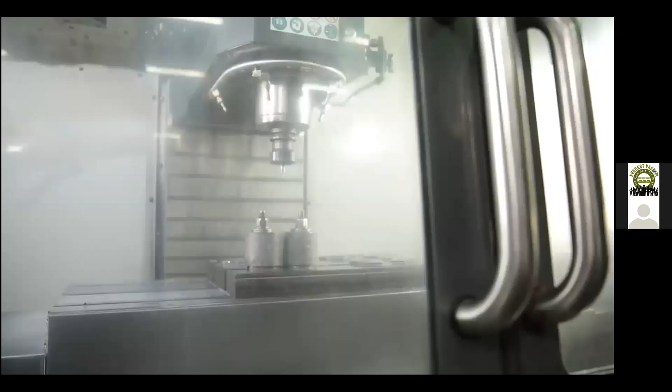In 1998, Everest Blowers Group went on to get its first ISO certification and also crossed international borders by exporting the products overseas. Over the years, Everest Blowers Group has made sure that it has abided by all industry norms through various certifications. The Everest Blowers Group has been associated with many different industrial giants from different verticals, bagging prestigious orders from them. An innovative thinking and approach has made the company excel in many first-time achievements.

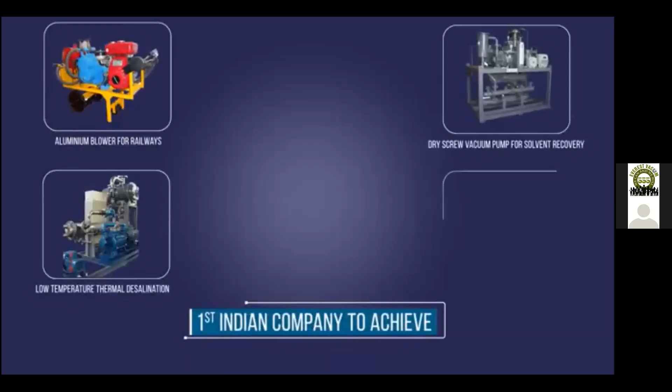Everest installed their first CNC machine in mid-2000s and since then has increased number of equipments to cater to the growing demand of the market.

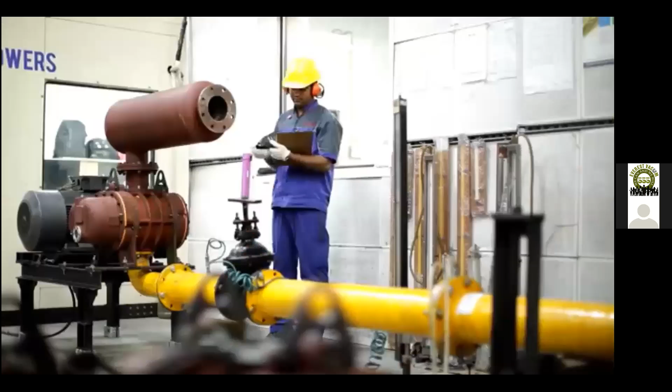Everest started manufacturing their range of tri-lobe blowers as a more efficient alternative for reduction in noise and vibrations. The group has received accolades and admirations in the recent years, touching the sky.

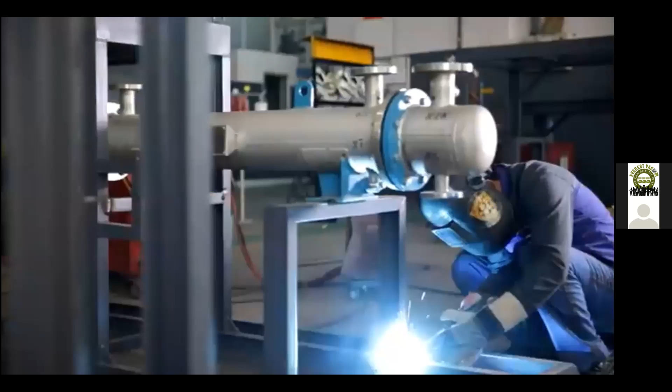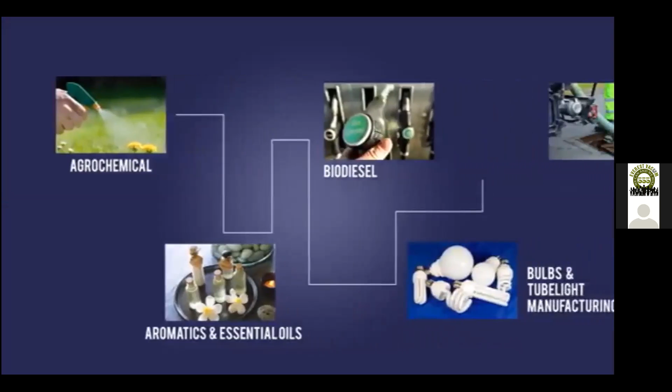The vacuum systems facility also started a dedicated unit to cater to the needs of complete skid-mounted systems requirements of our customers. The vacuum division is currently manufacturing around 350 to 400 complete skid-mounted vacuum systems annually, with a very wide industrial base spread across various applications.

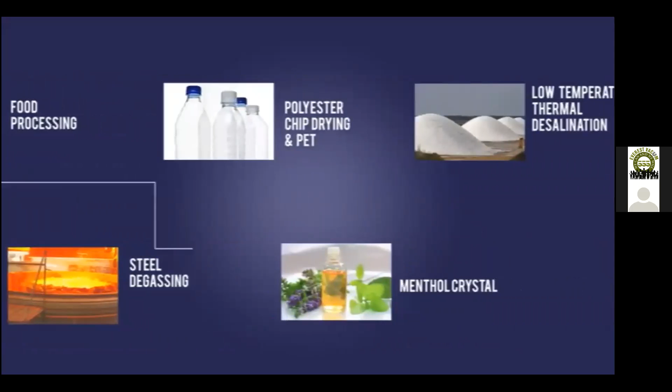The Everest Blowers Group is proud of its journey in scaling new heights and is in the pursuit of excellence. We are following latest industrial practices of Kaizen, 5S, and other lean manufacturing techniques.

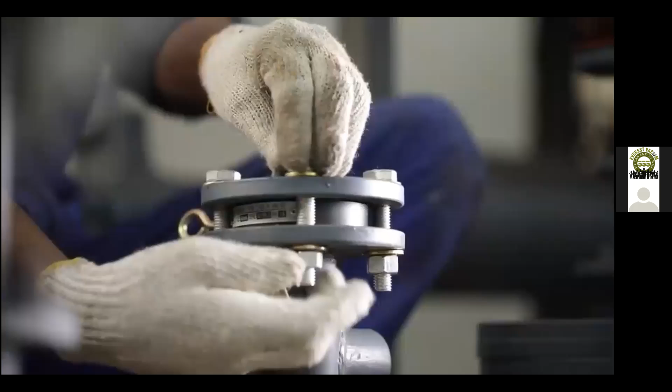To always remain connected with our stakeholders, we are available on all the leading digital platforms and have an online complaint portal, technical manuals, and a vacuum calculator.

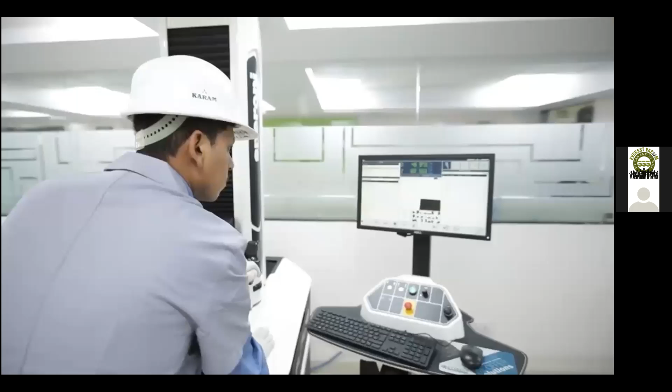It's been a little over 8 years since I've joined our family business, and we've experienced good growth with some diversification. I really enjoy what I do, as every day is a new learning of something interesting helping us serve our customers better. So at Everest, we believe in very strong fundamentals of quality and innovation.

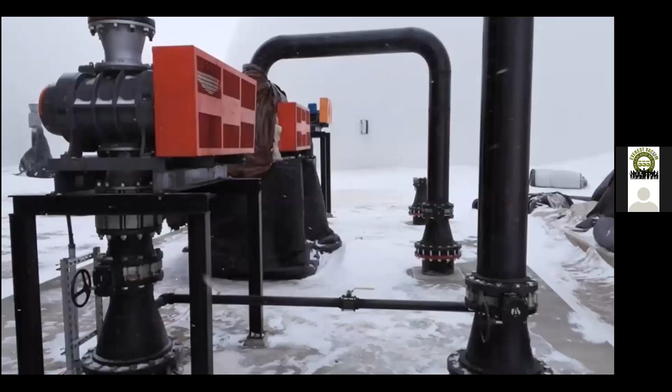We are the first and only company in India to have manufactured dry screw vacuum pumps, mechanical vapor recompressors, amongst many other products. With presence in the Indian market for over 3 decades and more than 150,000 equipments successfully installed, running in 38 countries worldwide, we are a trusted brand.

Our vision is to further build and sustain a positive relationship with our customers, to have an innovative and motivated work environment, and to ensure a bright future for all our stakeholders. The Everest Blowers Group, standing tall like Mount Everest, reaching for the sky, now and forever.

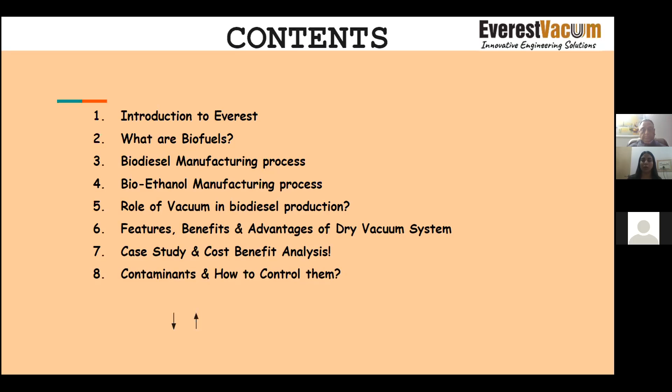All of this information we will explain you with one of our case studies and the cost benefit analysis. Then we will explain you about the contaminations and how we can control it. Then we will move forward. We will explain you about the rule of 2030 as we explained you in our previous webinar also.

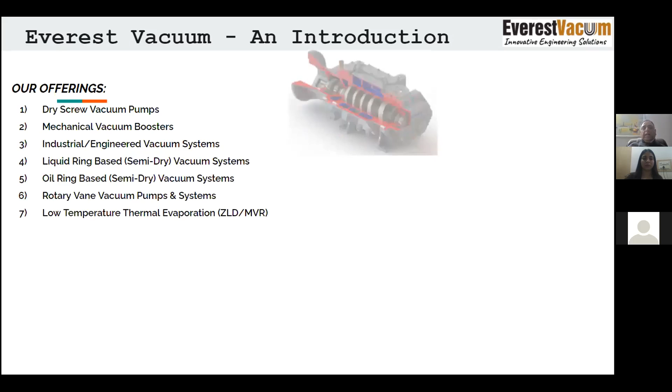introduce to you. We offer dry screw vacuum pumps, mechanical vacuum boosters, industrial engineered vacuum systems, liquid ring based which are also called semi-dry vacuum systems, oil ring based similarly called semi-dry vacuum systems, rotary vane vacuum pumps and systems, and zero liquid discharge low temperature thermal evaporation. These are some of the pictures of the products that we manufacture, as well as the complete solutions that we provide to our customers.

What's our promise? Our promise is clean, reliable, and sustainable vacuum, improved product yield, deeper and consistent vacuum, cost and space saving by right sizing, resulting in reduced operational cost.

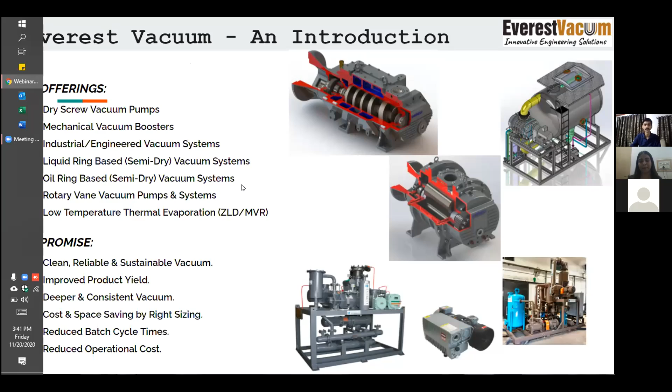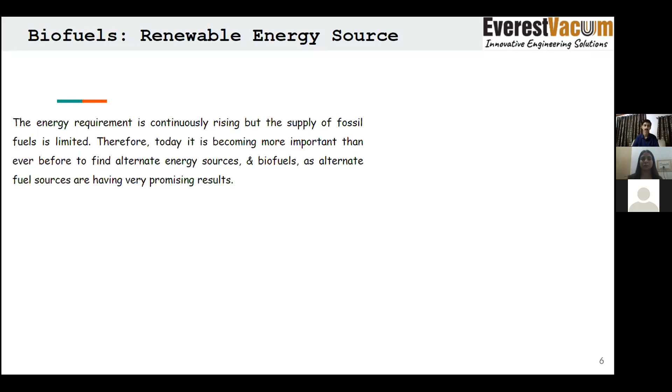Thank you, Chetna, and good afternoon to everyone. So what are biofuels? Biofuels are any fuels which are derived from natural sources, or biomass, and these are renewable sources of energy. Why do we say renewable sources of energy? Because these can replenish themselves over the course of time. And why do we need to talk about biofuels? As we know, the energy requirements are continuously rising, but the supply of conventional fossil fuels is limited. Therefore, we need to look after some alternative sources, and biofuels as alternative fuel sources are giving us very promising results.

Biofuels are well-engineered fuels, which are also gaining popularity due to the rising cost of fossil fuels. The most common biofuels are bioethanol and biodiesel. While biodiesel is manufactured by transesterification, bioethanol is manufactured by fermentation.

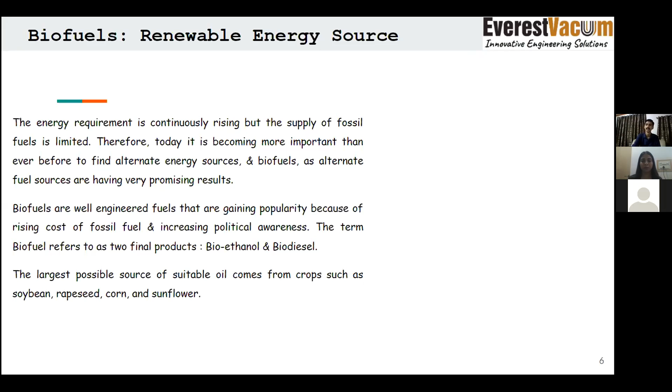The suitable feedstock which we can use to manufacture biofuels can be classified into 4 generations. In first generation, we have the food biomass, such as starch and sugar-rich crops. Second generation comprises non-edible feedstock, which is generally agriculture and forestry waste. The third generation is the integration of marine algae, whereas the fourth generation are genetically engineered crops.

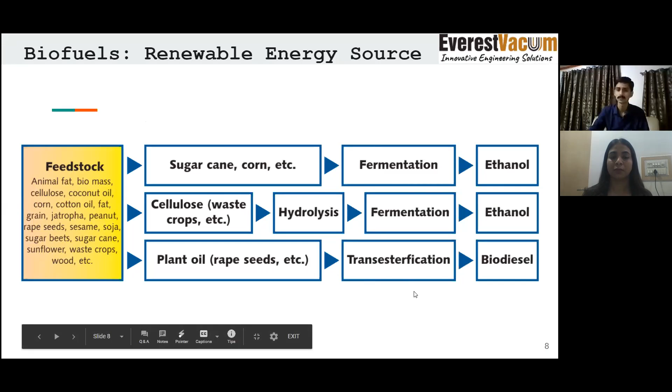As we can see, the feedstock, which may be animal fat, biomass, or any other oil or crop, can be processed either via fermentation or transesterification to give us ethanol and biodiesel. Let's start with biodiesel production. Biodiesel is produced by the process of transesterification.

As we can see from the reaction here, 3 moles of alcohol react with 1 mole of oil in the presence of a catalyst to give us biodiesel and glycerol as the end products. The catalyst has to be a strong acid or a strong base. Generally in the industry, sodium methanolate is used as the catalyst. Here is a picture of raw biodiesel and glycerine, which is obtained by this transesterification reaction.

This is obtained through this separator. Once we have separated the biodiesel and glycerine, this is how the biodiesel is looking after the washing process, and this is the pure palm biodiesel oil. This glycerol, when purified and cleaned, can be used in the food, oleochemical, and cosmetic industry.

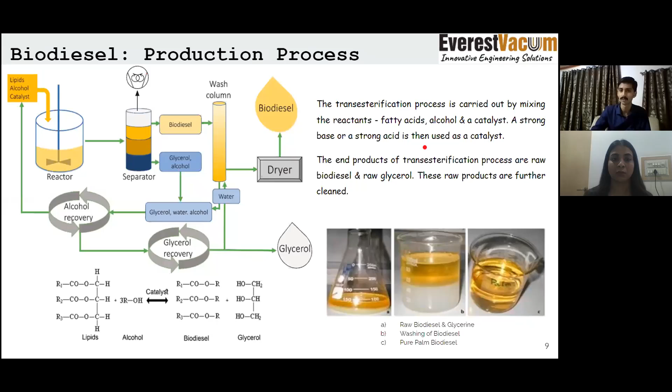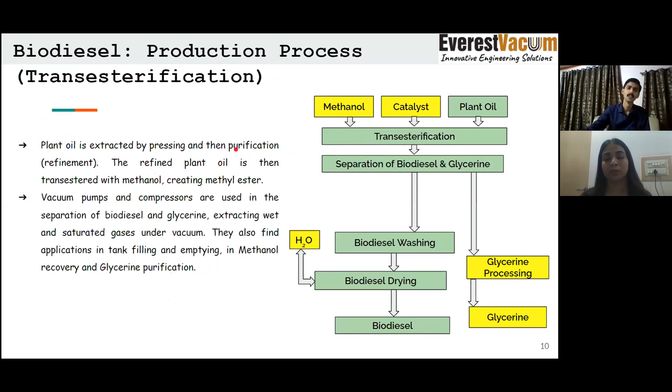Here we are depicting that the vacuum systems are connected to the separator where we need to separate biodiesel and glycerol. In this process of transesterification, for any plant oil, methanol is the most commonly used alcohol in the industry. Since we are transestering methanol with the oil, the product we receive is methyl ester. Vacuum pumps and compressors are used in the separation of biodiesel and glycerine at this stage, and extracting wet and saturated gases during this stage, in methanol recovery, glycerin purification, and many other applications.

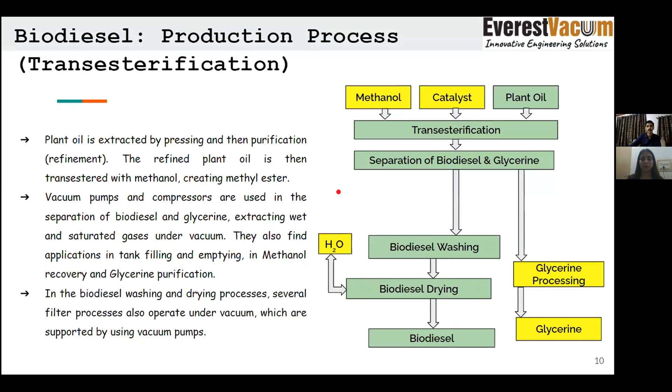If we take a typical example, we have 1000 kg of oil, which is put into reaction with methanol and sodium methanolate. What we receive out of the reaction is 1000 kg of fatty acid methyl ester, some glycerine, and free fatty acids with roughly 1 to 2% of moisture content. This is generally a batch operation where the temperature ranges from 70 degrees to 250 degrees, and the working vacuum is in the range of 100 torr to 0.5 torr.

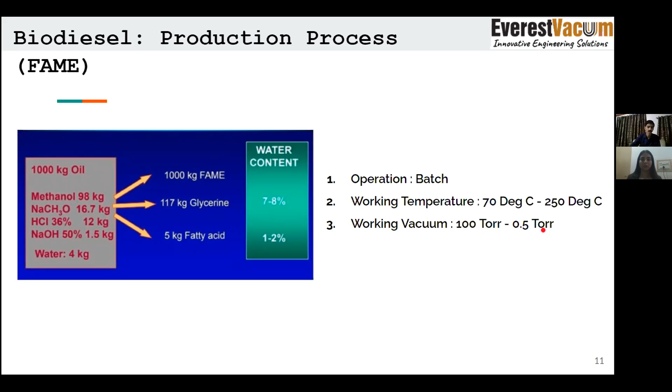Coming over to bioethanol production, we can see if we have sugar-rich crops, such as sugarcane, we can directly put it into fermentation. Or if we have corn crop and other cellulosic crops, we need to put them through hydrolysis before we can process for fermentation.

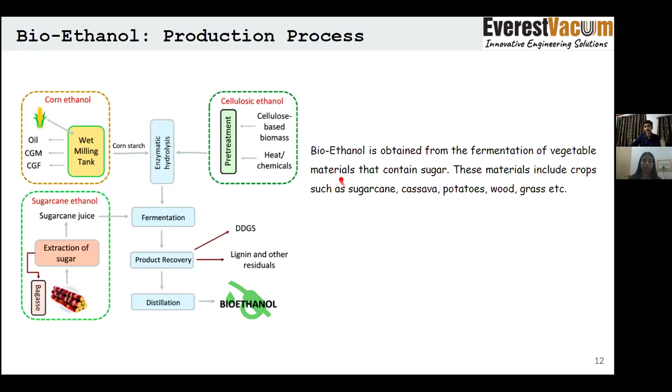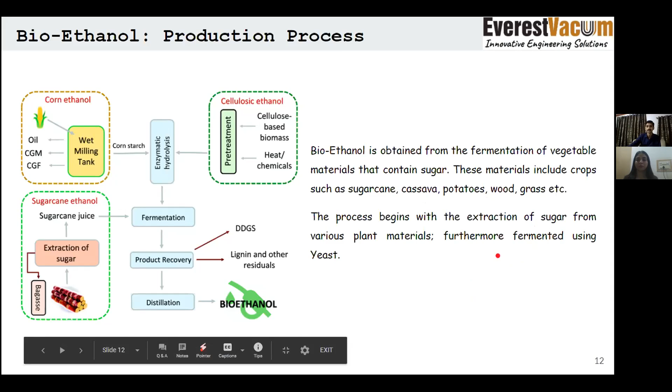Bioethanol is obtained from the fermentation of vegetable materials. Some crops could be sugarcane, potatoes, wood, and grass. In the fermentation process, these biological materials are transformed into other substances by adding enzymes. Once we are through this fermentation process, our raw material, which is sugar, breaks into ethanol by liberating carbon dioxide.

Now at this distillation stage, before distillation the ethanol which we receive is 7 to 10% pure. We can distill the ethanol to get up to 70% purity. By further distillation and reflux techniques, we can improve the purity to 95%. And at that stage, when we adopt the alcohol dewatering technique, we receive bioethanol which is 99.5% pure, also known as fuel grade ethanol.

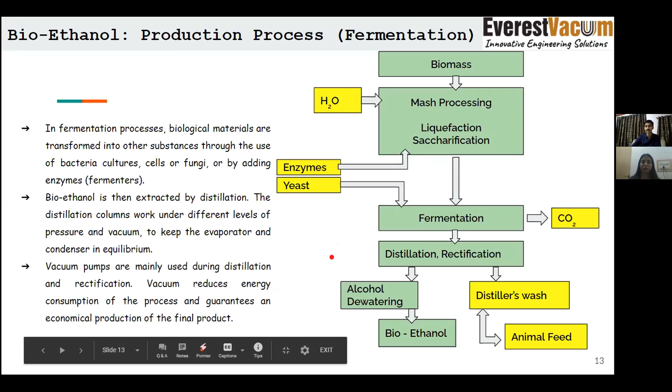Vacuum pumps are used during the distillation and rectification, and reduce the energy consumption of the process, guaranteeing an economical production of the final product. This is a cycle.

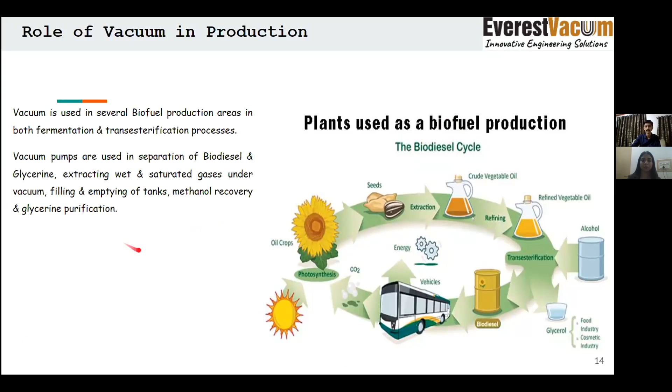These were earlier done either by using conventional systems or using wet vacuum systems, none of which can offer the same efficiency as dry vacuum systems. Therefore, dry vacuum packages from Everest, which offer efficiently high vacuum, are rugged to process variations, also capable of handling process vapor and liquid carryover, making them the ideal choice because of their reliability in producing consistent vacuum.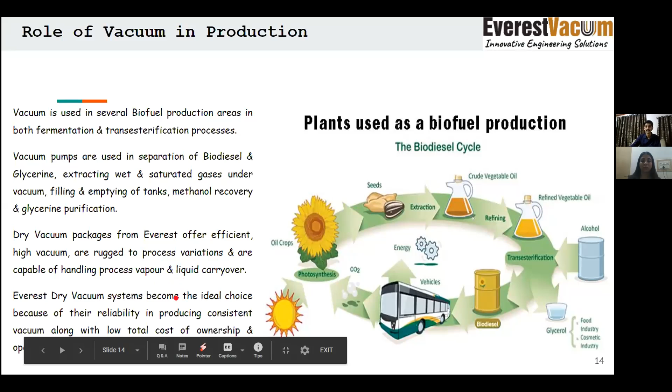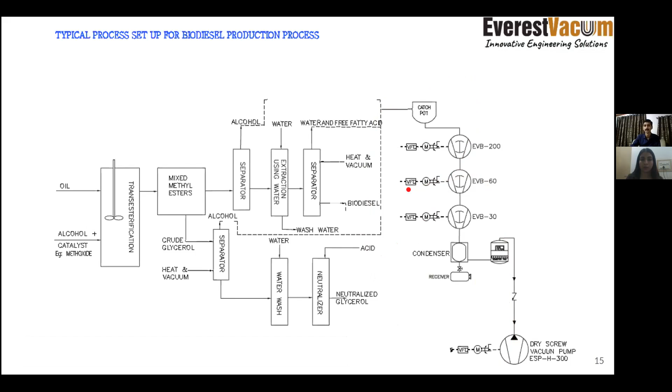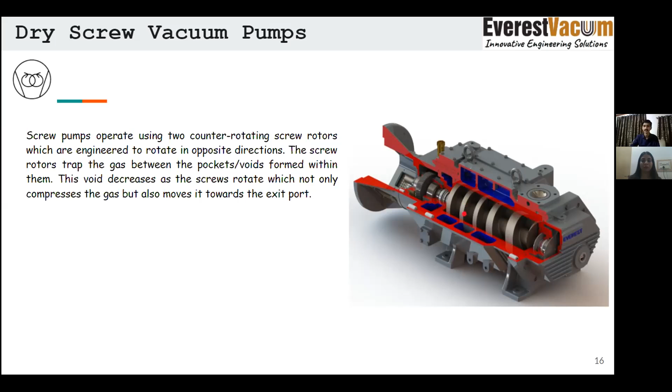Screw vacuum pumps, which are a flagship product, and we, being the first and only Indian company to have manufactured these in-house, these screw pumps operate using two counter-rotating screws. These rotors rotate in opposite directions and trap the gases in between the voids which are formed. These voids keep on decreasing, which not only compresses the gas, but also moves it towards the exit.

Since the screw pumps have numerous facets, there are very micro spaces between the rotating screws, but still there is no requirement for any lubrication, and therefore we call it dry screw vacuum pumps. They have a high tolerance against particles and low ultimate pressures, highly efficient for internal compression, and very low maintenance and operational cost.

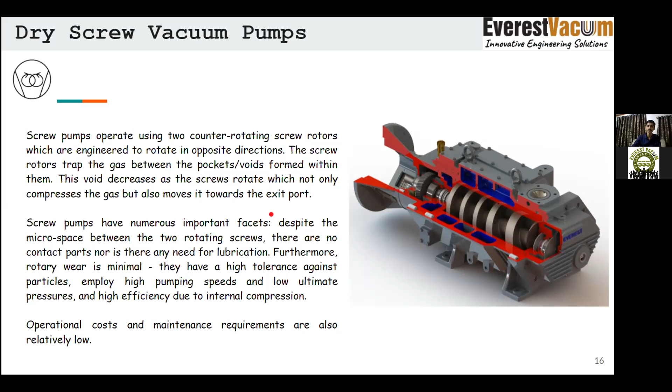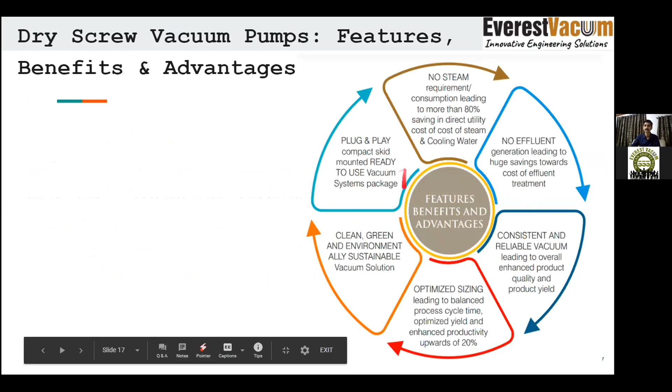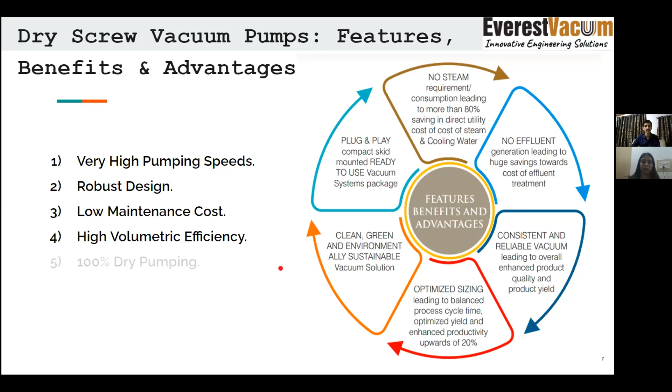Some features and advantages: there's no steam requirement, which makes a system dry and also helps in cutting down the effluent generation and effluent treatment cost. The vacuum achieved is consistent and reliable. Our systems are compact, skid-mounted plug-and-play units. We ensure very high pumping speeds, robust design, low maintenance cost, high volumetric efficiency, and 100% dry pumping.

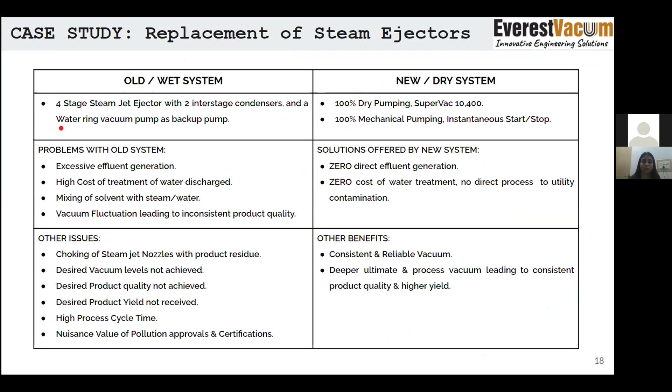We'll start with a case study where we have replaced steam ejectors with our mechanical vacuum system. The case in consideration is the replacement of a 4-stage steam jet ejector where a water ring pump was used as backup. What we supplied is a 100% dry pumping SuperVac 10,400, with 3 stages of mechanical vacuum booster and a dry screw vacuum pump at the back end.

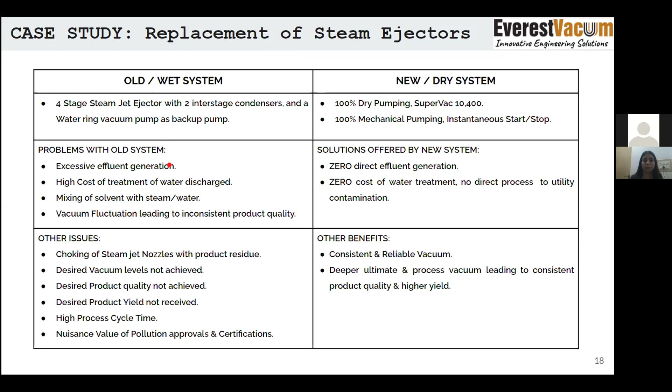There were problems of excessive effluent generation, high cost of treatment, mixing of solvent, and vacuum fluctuation. By employing a dry screw vacuum system, we have given zero effluent generation, no cost of water treatment, and no utility contamination. We have also given consistent and reliable vacuum, leading to consistent product quality with higher yield.

There was an interesting discovery during this case. When we installed a dry screw vacuum system, we found there was some choking in the screw pumps by product carryovers. On investigation, it was identified as the free fatty acid which we were removing. This fatty acid was getting mixed and choking the pump.

This is when Everest Technical Services came into the picture, and we addressed this problem by installation of safety accessories. Today, these systems are running at site trouble-free for more than a year.

What did we do here? We installed an interstage condenser along with a proprietary vacuum trap so that we could arrest most of the incoming vapors, and 95% of those were condensed.

As we can see in the cost comparison, their consumption of steam was 36 lakhs for the entire year, whereas the power consumption in our dry vacuum systems is only 14,28,000.

The utility cost was 8,76,000, which came down to just 1 lakh rupees. The usage of an interstage condenser, which led to some solvent recovery, is saving almost 3 lakh rupees per annum. The maintenance cost slightly increased, but overall there's a direct cost saving of 29 lakhs over a period of 1 year.

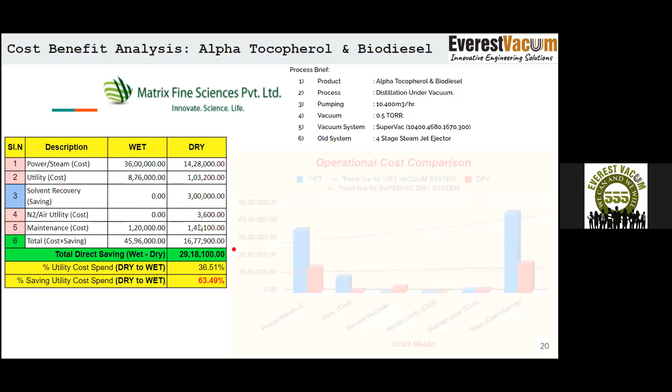Apart from this, the 18 hours batch came down to 16 hours per batch. And the product quality also improved.

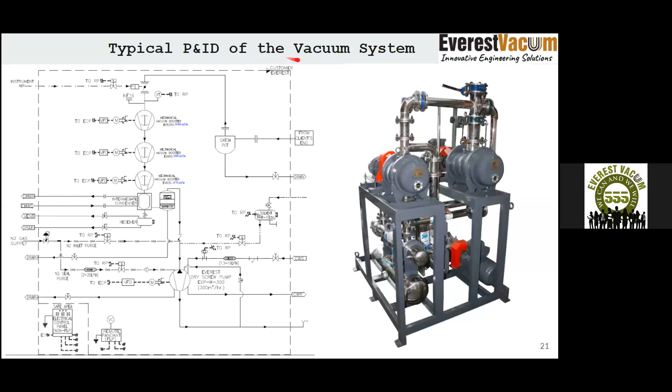This is a typical P&ID of our vacuum system. What we are supplying here, our vacuum system is connected from the client system. There are 3 stages of mechanical vacuum boosters, our intermediate condenser, a proprietary vacuum trap, followed by a dry screw vacuum system.

Along with this, we provide an electrical control panel which houses the VFDs for all the machines and a PLC to control the entire system. We have a vacuum transmitter installed with a vacuum controller so that we can set the points we want to operate vacuum at.

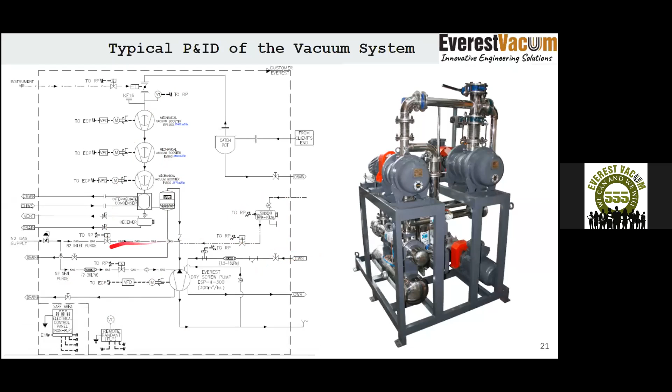There's a safety feature for solvent flushing, to flush out all the condensable gases at the end of the process cycle, and continuous purging of nitrogen or instrument air. This is the interstage condenser where we can recover most of the incoming vapors.

A pictorial view, if we say, here's a dry screw vacuum pump with 2 boosters and an intermediate condenser.

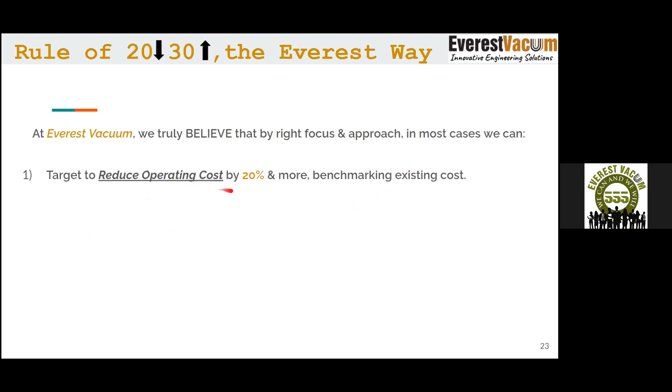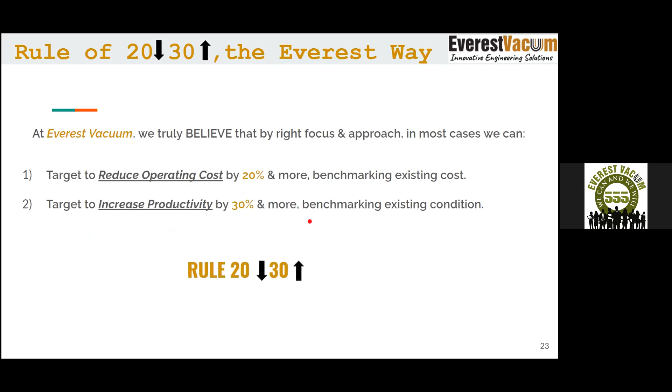We have a rule of 20-30 at Everest, where we believe that by right focus and approach, in most cases, we can reduce the operating cost by 20% and target to increase productivity by more than 30%, benchmarking the existing conditions if we replace and select correct vacuum systems.

Now we would like to talk about how to control contaminants and improve pump performance. Process vapors and condensation inside the pumps can create a great nuisance value. We have two options to avoid these instances. The first is gas blasting or dilution techniques, where we can purge instrument air or nitrogen into the system.

Instrument air can be used in any normal process, but if the gases which we are transferring are flammable, nitrogen needs to be used.

Another popular approach is hot pumping, where we can run the pump hot. We use a thermostatic control valve to regulate the temperature of the pump jacket, maintaining it at a certain level so that the vapors do not condense inside the pump.

The next problem might be dust and particulates, which can be a byproduct of a wide range of processes. To prevent particulate matter from entering the vacuum system, Everest provides inlet filters suitably designed as per your process, so there's no contamination inside the pump.

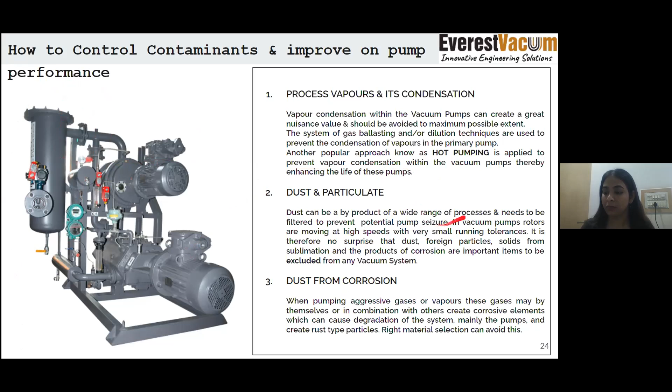At Everest, we have 7 golden rules for vacuum pump maintenance. First and foremost, the reading of the operation and maintenance manual and following the preventive checkups as per SOPs.

Rule 2 is following the warm-up cycle. Rule 3 is never to block the outlet of the pump. The discharge line should always be free from any blockages.

Rule 4 is to install an inlet cold trap so that most of the corrosive vapors and contaminants can be trapped outside of the pump.

Rule 5 is to use gas ballast, which we discussed while working with condensable vapors. Rule 6 is to protect the pump from particulates with an inlet filter.

Rule 7 is to properly run the pump with the shutdown cycle and follow solvent flushing and purging. Simply stated, if we take care of our vacuum pumps, they'll take care of our process.

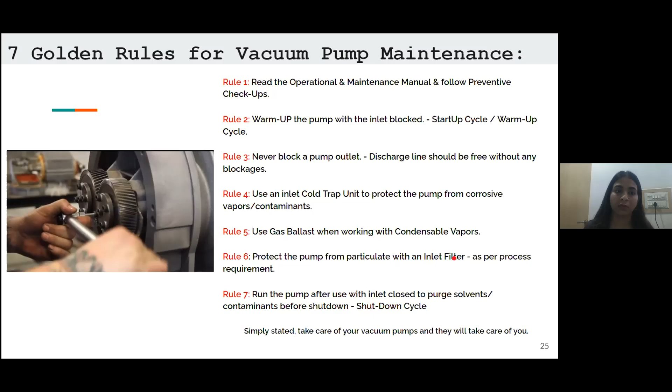As we mentioned, this is our 5th webinar. We have previously conducted 4 webinars where initially we talked about the basics of vacuum and the role of vacuum in industry. Then we talked about the selection of the right vacuum pumps for chemical and process industries. We had a webinar on operation and maintenance of dry screw vacuum pumps, and most recently we organized a webinar on the operation and maintenance of mechanical vacuum boosters.

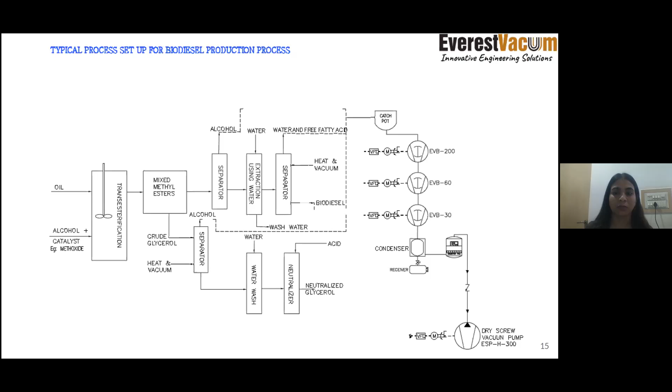And distillation under vacuum, which may in other terms be called separation, is the preferred way to go about it.

Would you like to add something to this, Priyanshu? No, sir.

Then we have another question from Mr. K.S. Rao, who says he's an expert in biodiesel production. He says that mechanical systems might be prone to high maintenance or breakdowns. However, steam jet ejectors have no moving parts and can consistently provide one torr vacuum. What is your response to this? Please elaborate.

I think I'll take the lead on answering this question for him. Good afternoon, Mr. Rao. I am Dhruv Malhotra. I am with the TSG group at Everest. Our job is to ensure that we overcome such challenges by working in very close association with experts like yourself.

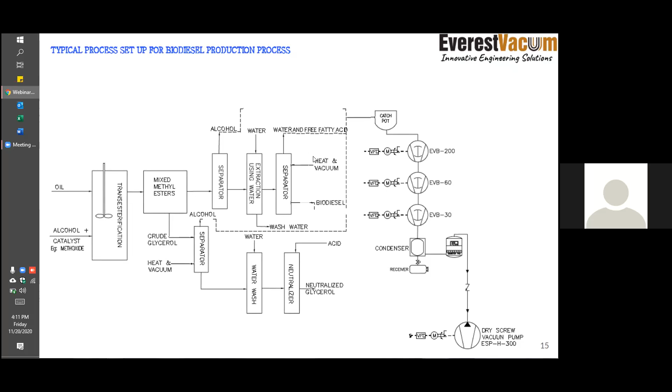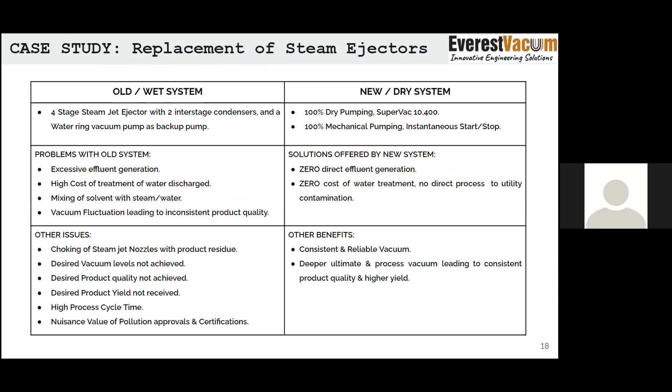We at Everest, like Priyanshu showed—Priyanshu, can you take us to the page where you showed an interesting discovery? Initially, when we supplied the system to this company manufacturing biodiesel, we faced issues of frequent pump choking. We were able to identify exactly what was the reason, and after identification, we were able to eliminate the choking process by installing proprietary traps in line before the vacuum pumps.

Mechanical boosters per se have no effect from process material coming into them, unless it is solid process material, which in most cases does not happen because the operating vacuum is 1 torr, and at that vacuum there is no medium to carry away solid particles—only air or process vapors are being carried. So by using traps and efficiently designed filters and condensers, we are confident that we can eliminate any process carryover that would lead to pump failure.

This being said, if you study it, the bigger the size of the system, the faster the payback, and the cost you can recover through efficient dry pumping is a much bigger advantage than the maintenance downtimes you might face by using mechanical vacuum boosters. Biodiesel is a new upcoming line in India, but we have been using such systems very heavily in other processes such as edible oils, for deodorization of edible oils. The processes are all similar—it's just that the end product changes in various cases.

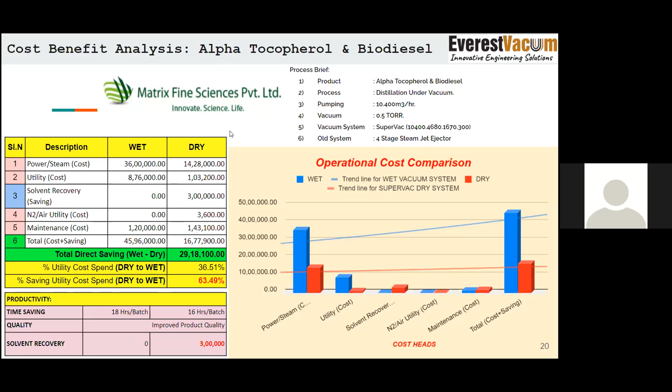If it is solidifying in your kettle or in your process, I don't have a solution because that is beyond our reach. But in our vacuum system, we don't let it condense. So what we do is something called hot pumping.

Hot pumping, how does hot pumping work, or what is the concept of hot pumping? Once the vapor reaches our vacuum system, our objective is not to allow vapor to condense within our vacuum system. If it condenses in the condenser, well and good, no problem. But within the pumps, it cannot or should not condense. If it condenses, it will lead to problems. So that's why we introduced the concept of hot pumping.

Here, what we typically do is when these pumps are running, they are generating some heat of compression. Because of that heat of compression, they are getting hot. We circulate water in a jacket around the pump, very similar to what happens in a car engine.

You have a radiator and you have hot water being circulated to cool down the cylinders. A similar thing happens in the pumps also.

That same principle that works in cars, in winters we regulate the temperature of the water in the pump using something called a thermostatic control valve. The objective of that valve is to maintain the flow rate of water such that the pump remains in a hot state and does not cool down below a particular temperature.

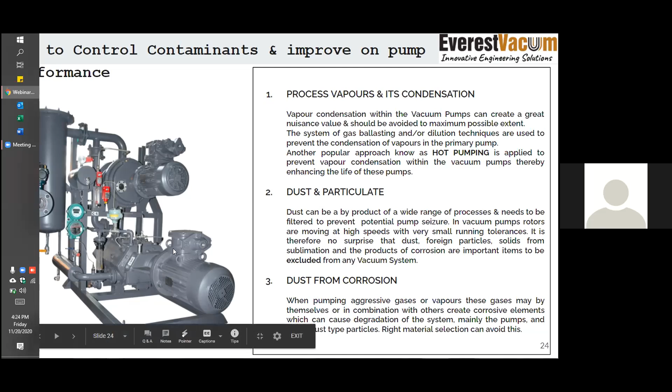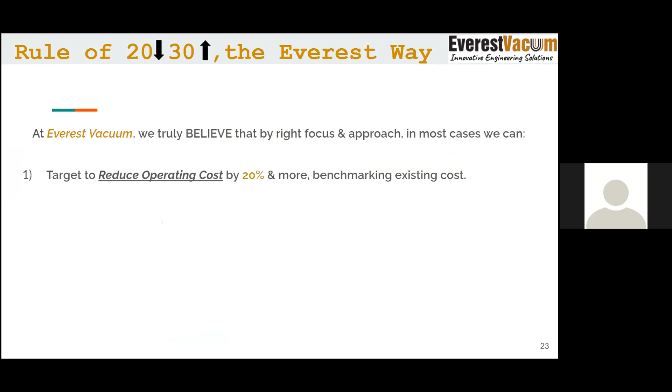I have got another question from Mr. Rao: is vacuum sealed in the system after power failure? Yes, of course, there are check valves in place. As soon as the power goes off, these mechanical check valves isolate and close the system.

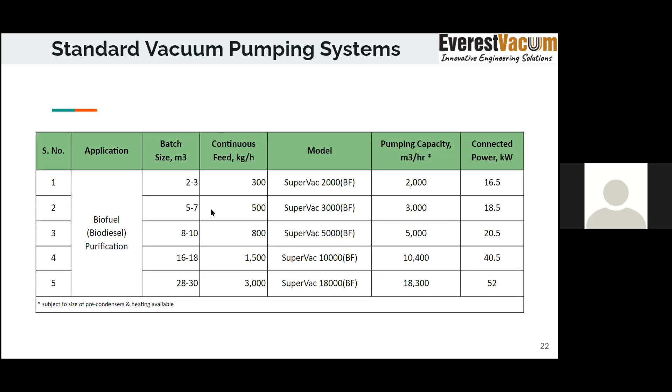Vacuum pumps can work under a very vast spectrum of temperature. You can have vacuum pumps operating at say 4 to 5, 7, 10 degrees also. We do that in freeze drying applications where the triple point of water is at 4 degrees, so we need to operate below 4 degrees. The highest discharge gas temperature we can allow a vacuum pump to pass through is 150 degrees in case of dry screw vacuum pumps. So the spectrum we work in is anywhere between 0 degrees to about 150 degrees discharge gas temperature.

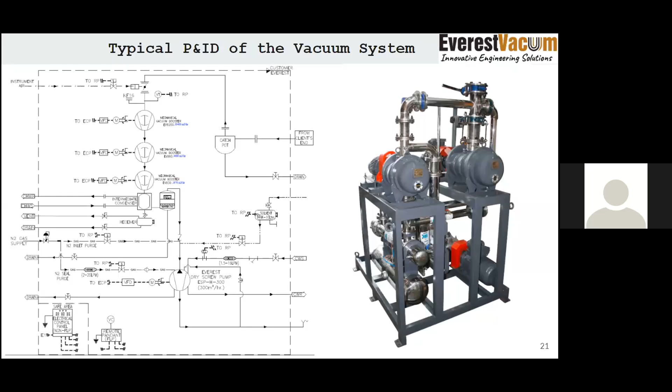Mr. Rao has one more question, sir: we can remove the FFA of vegetable or animal fat by molecular distillation using dry screw pumps. Please share if you have any case study data like feed FFA and product FFA.